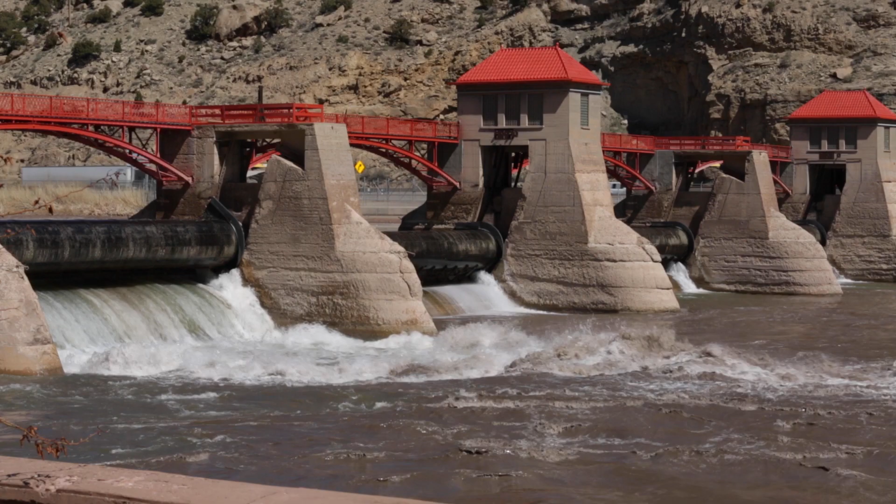I've got a personal connection with the irrigation history in the Grand Valley. I grew up here, so I always knew how important irrigation was. My grandparents on my mom's side of the family were caretakers of the roller dam in De Beque Canyon from 1926 until 1959. So I got to go up there as a youngster and watch Grandpa do what he did with the roller dam to make it work.

Then on the other end, my dad's side of the family, they were end users of the system. They bought land and planted orchards on East Orchard Mesa in the early 1930s, and we used it there. Growing up, my parents had land and orchards about a half a mile west of Granddad's place. So I grew up around irrigation and peaches and all that kind of stuff until about 1963, when the big freeze came along.

It killed a lot of the trees in the valley, and it changed things for a lot of people. So anyway, I'd invite you to join me through this time travel as we learn the interesting history of irrigation in the valley and the fact that it's really the true lifeblood of our existence here.

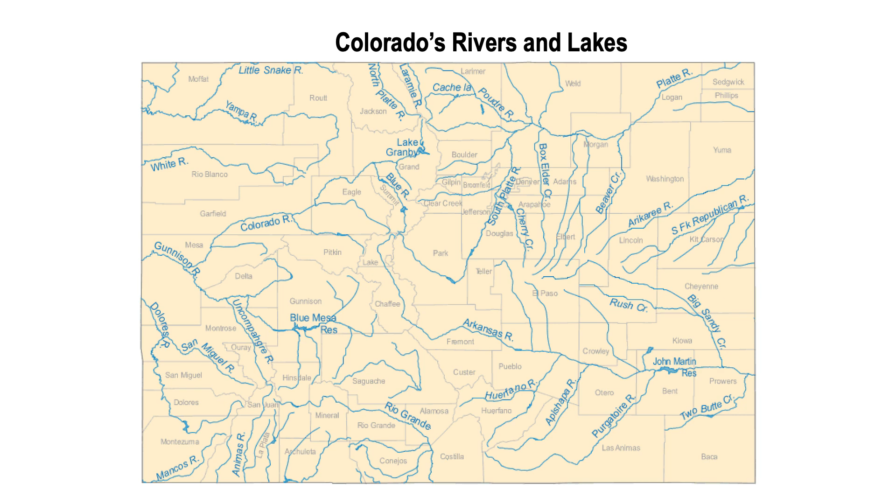Next here are the Colorado rivers and lakes. Literally all but one river runs out of Colorado. They start in Colorado, so we truly are the headwaters. You might have heard a lot of talk recently about water rights and the impact it has on Colorado and the western slope. We're really protective around here of our water, which has some of the oldest rights in the state. We're pretty protective of that water being diverted from the western slope over to the Front Range, because it's so vital to us.

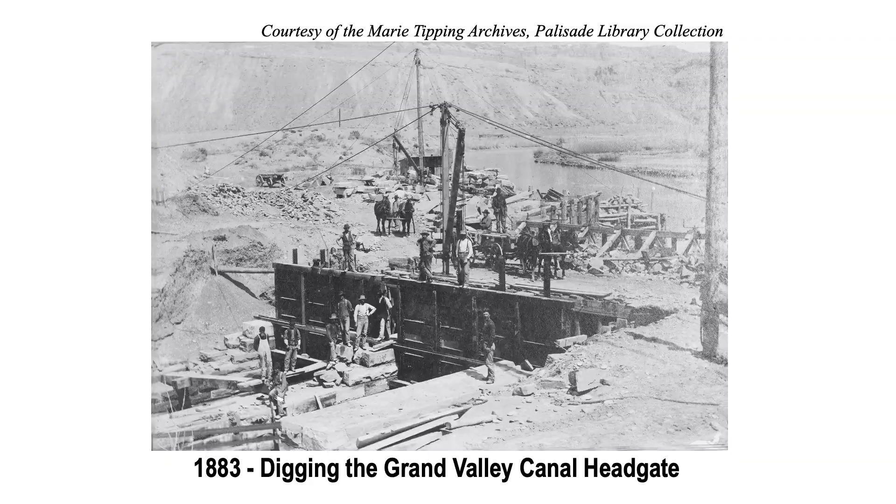This next photo is a more modern photo - that's what the headgates look like now. If you go up on the Orchard Mesa Hill, which is 38 Road, and look down on the river, you can see where the water is diverted for the Grand Valley Canal System. Or you can go to the end of Brentwood Drive out past Taylor Elementary School in Palisade and look out over the river and see headgates there.

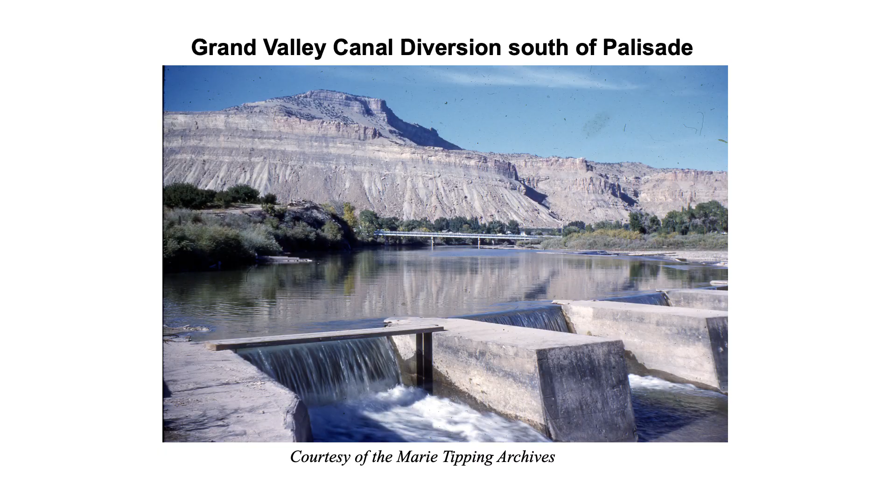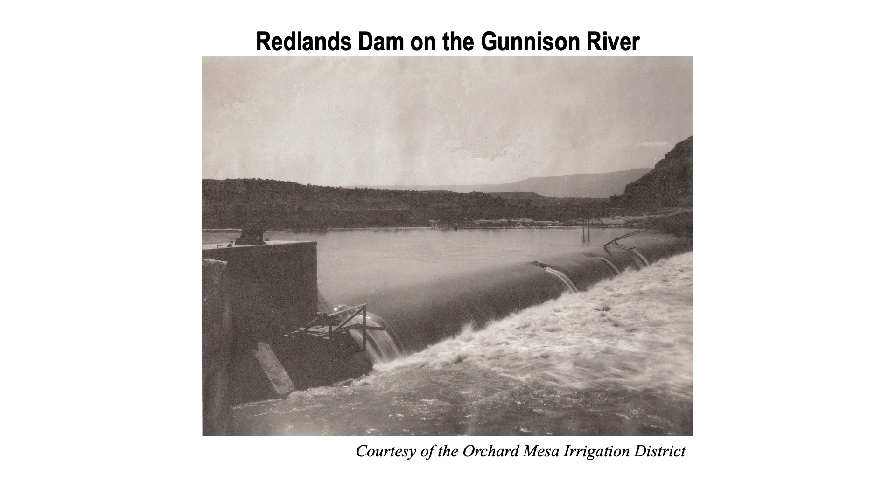He also built another ditch called the Crawford Ditch, built in 1888, which diverted water from Rapid Creek above the Grapevine Ditch, then ran north over a large tract of land called the Lloyd Ranch, near Mesa, Colorado.

The Grapevine and Crawford ditches are no longer in use. The farms on Rapid Creek now get their water from the Orchard Mesa Irrigation Canal.

Then we have Colonel Bauer, another Palisade resident who was one of the early settlers in the valley. He diverted water from the river to water land in the Vinelands, which originally was called Poverty Flats, east of Palisade.

John Gordon owned a pumping plant in the Vinelands also, and brought water to the Orchard Mesa Canal through the eastern part of the Vinelands.

Frank Berger built another canal called the Mount Lincoln Ditch early in 1890. It was to be laid out near the proposed Highline Canal, which came along later, and they used only electric pumps to lift water from the river.

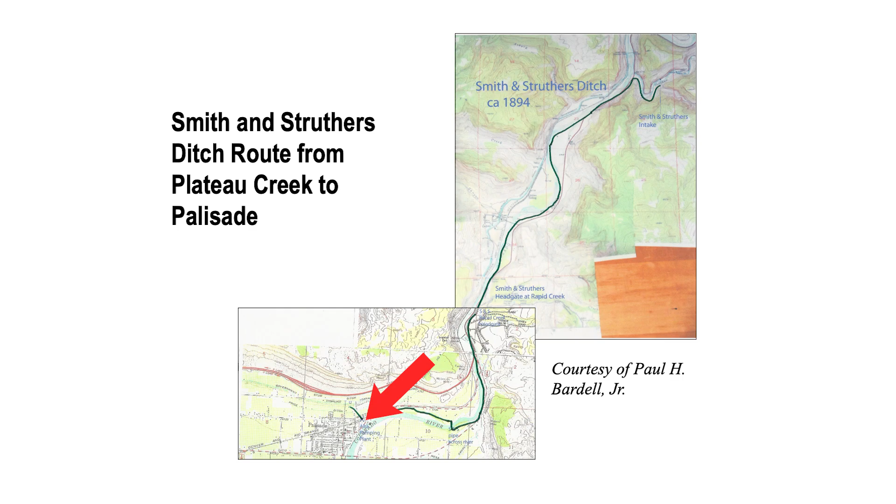You can see here on the map, if you look carefully, where that pipeline crossed the river right along in there. The Stub Ditch was in its flume around 1912.

They began building it in 1903 under the name of the Highline Mutual Irrigation Company, which authorized construction of this second canal, later known as the Stub Ditch.

It began delivering water in 1904, and has the distinction of being the only irrigation project in the county that was developed solely by the landowners.

In 1904, the Mount Lincoln Power Canal and the powerhouse suffered damage from spring runoffs. They had a lot of financial troubles, and when the pumping plant needed to be rebuilt, it was going to cost them $34,000, which the company couldn't pay without going bankrupt.

So the voters approved the Palisade Irrigation District to float bonds for the indebtedness to fund the repairs. The first action of the Palisade Irrigation District was to purchase the Mount Lincoln Land and Water Company and the Highline Mutual Irrigation System.

This included all of its canals, water rights, pumping plants, and related land, purchased for $150,000 in January of 1905.

Gravity-fed ditches were not sustainable, and there was a lot of seasonal variation in river height, so a lot of the early projects used electric power only to pump water into the canals.

There was always an irregular supply of water, and in fact in 1909 it caused so much conflict that the Palisade Irrigation District ditch riders were appointed sheriff's deputies to keep the peace amongst the people.

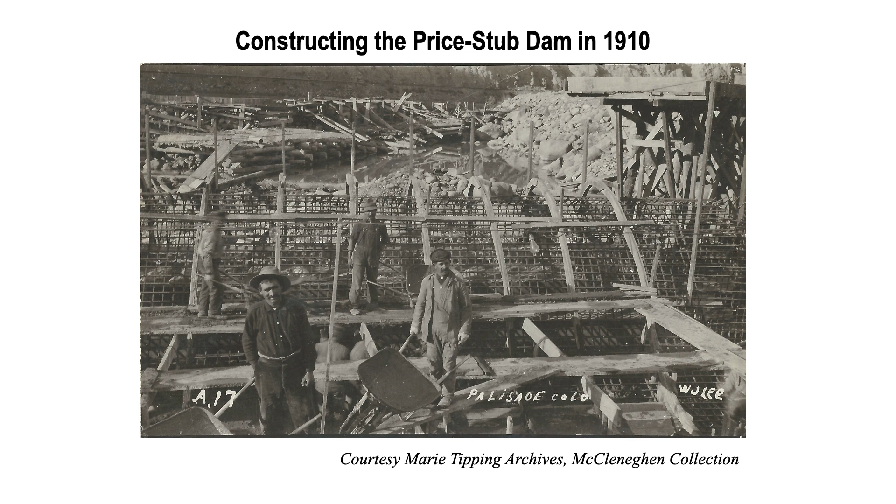Here's another later photo of the same dam, located just upstream from where the current I-70 bridge crosses the Colorado River leaving Palisade going into DeBeque Canyon. A fish ladder was added on the east side of the dam in 2007, and riprap material was added later, so it no longer looks the way it does in this photo. This is a whole different presentation of what it used to look like back in the day.

Here's a map from 1905 of the alkali. Water wasn't the only important factor—soil was too. Besides Palisade's perfect climate for growing peaches, this map shows they had good soil there. The darker areas show larger concentrations of alkali, closer to the river, while areas further away were freer of alkali and better for growing crops.

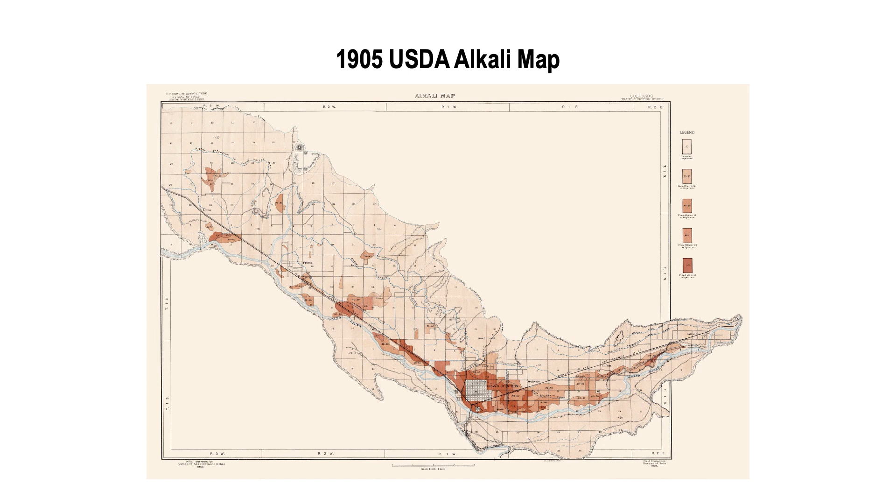This next slide shows construction of another dam that no longer exists. This dam was built across the Colorado River above the current roller dam and was completed in 1909. It was later removed, but it served as a diversion dam about half a mile above the roller dam.

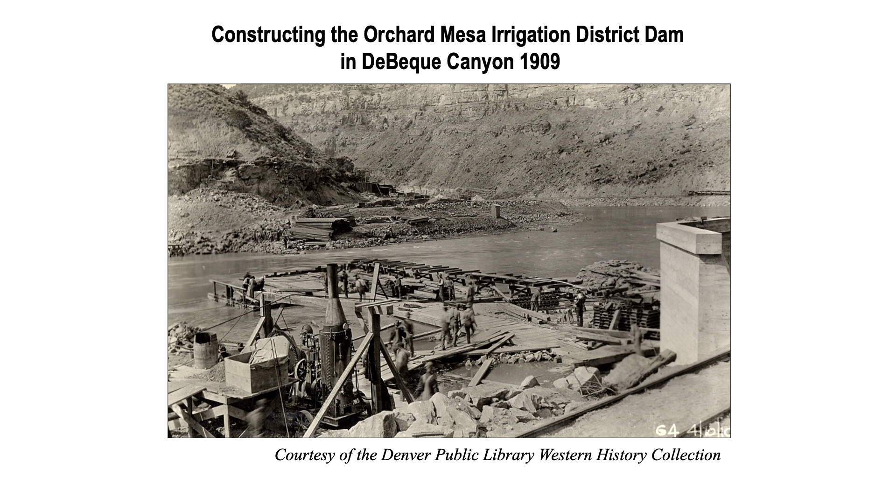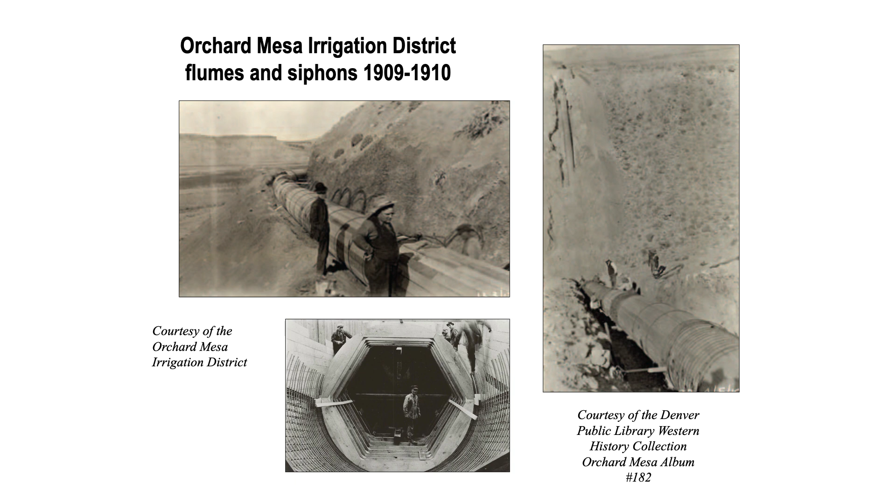The nine-mile-long wood stave power canal was built on the east side of the river, with several siphons and flumes built to carry water over uneven terrain from the dam to the base of East Orchard Mesa Hill. Here's another photo of the construction of the pumping plant serving East Orchard Mesa.

This is a view from the top of East Orchard Mesa. There was another small irrigation system called the South Palisade Irrigation District, built just east of the Orchard Mesa Irrigation District. It had a 300 horsepower gas-producer pumping plant, the largest of its kind ever erected in Colorado, but it had a lot of trouble and was finally abandoned in 1918.

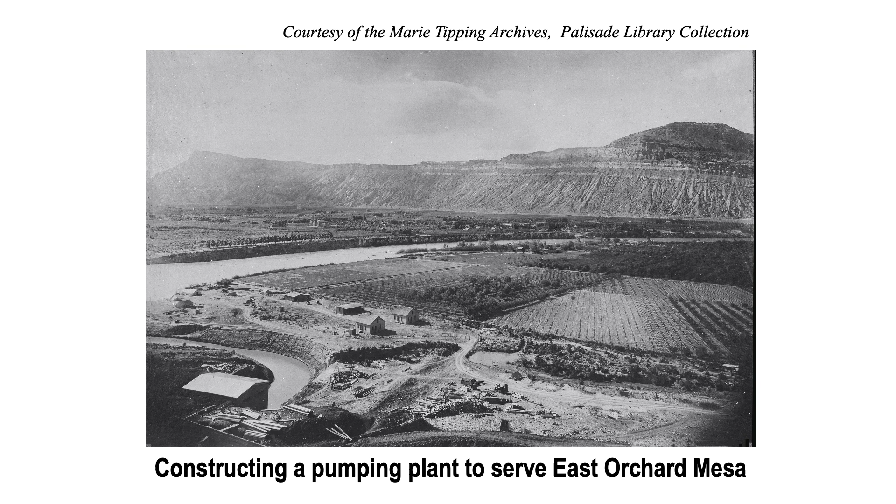If you know where the Sobre El Rio subdivision is, on the east end of Orchard Mesa, that's about where the South Palisade Irrigation District was. After they lost their water, they had to abandon their orchards, which is why it reverted back to desert. Here's another photo of men pounding rivets into the penstocks, the pipes that go up the hill.

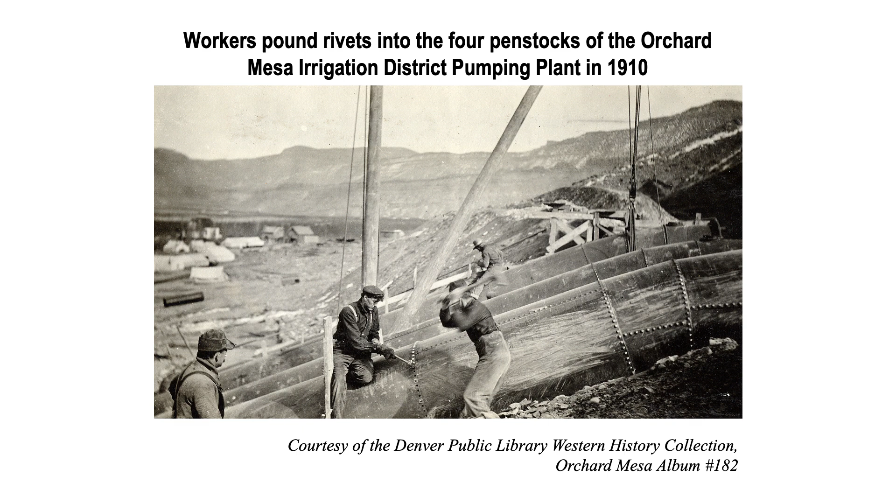This was for the Orchard Mesa Irrigation District project built in 1910, just another example of the hard work it took to build these systems. It's important to note that a lot of the original structures are still in place and still functioning today.

Here's another photo from 1939 of the pumping plant that pumps water from the canal and the river up to Orchard Mesa onto the two canals up there.

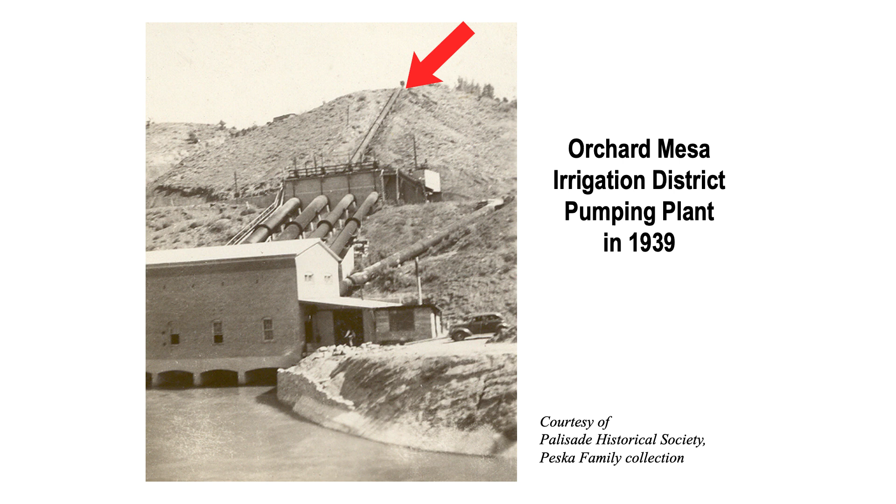You can see from this early history how complex and difficult it was to build all these systems. So in 1915, when the roller dam came along, it was really viewed as a good solution for many of the smaller irrigation projects to have their irrigation water on a more consistent basis.

The Palisade Historical Society celebrated the 100th birthday of the roller dam five years ago, in 2015. We sponsored a big birthday party for the roller dam in June of that year.

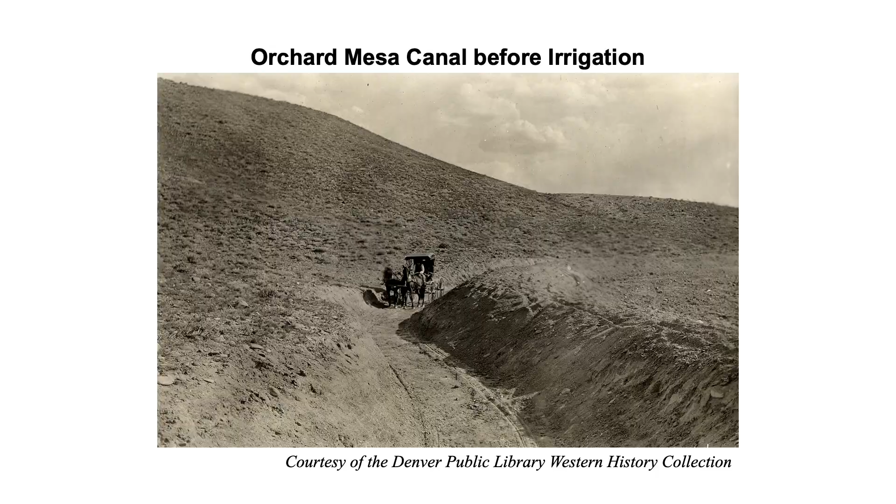The Grand Valley Project was one of the first 6 projects activated by the Reclamation Act of June 1902, which created the Reclamation Service, later the Bureau of Reclamation. They withdrew land from settlement to prevent it from being dispersed before the projects were completed.

The canal routes were surveyed in 1897, and work on the alignment of the canals began in 1902. They concluded the flow of water was sufficient to supply 2,000 acre-feet during irrigation season, but it wasn't practical to extend the system all the way into Utah as some had envisioned. It would still reach another 51,000 additional acres at a cost of $27 per acre.

In 1903, a Grand Junction group proposed the project be constructed and paid for with private funds, so the government backed out, not wanting to interfere with private enterprise. But after several years, it became apparent the plan for private construction was not going to proceed.

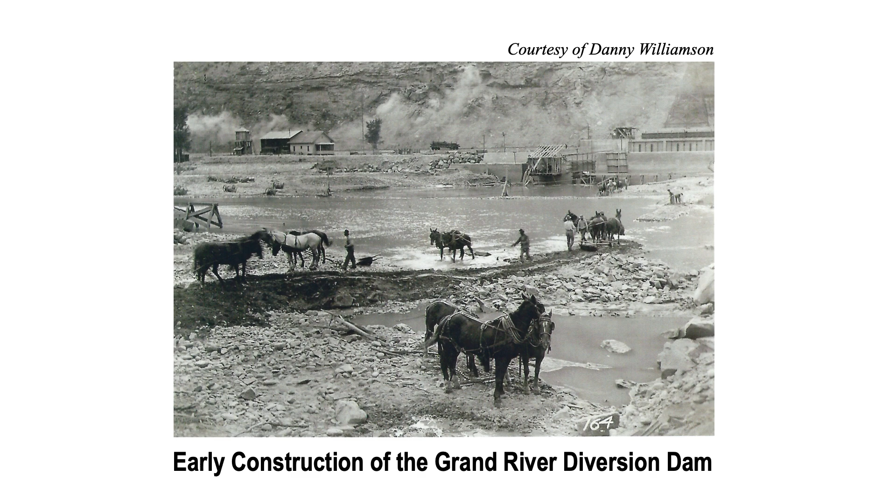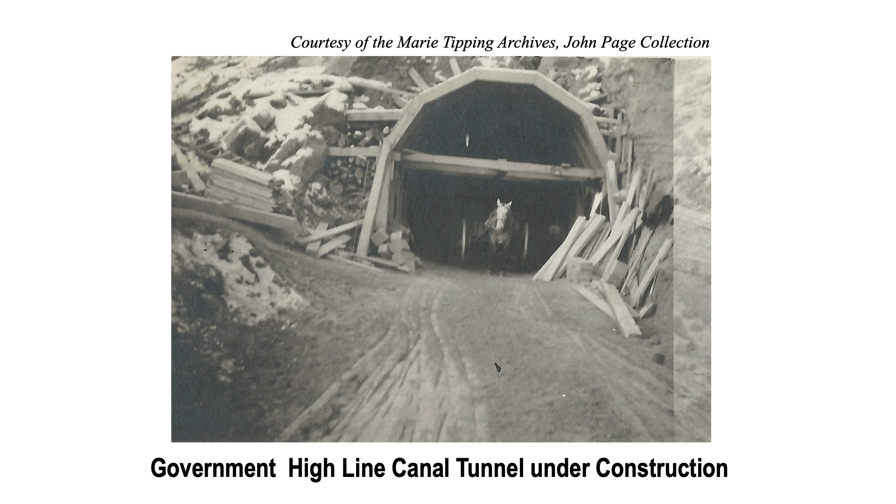I have to tell you a story my mom used to tell. She lived up at the roller dam, and the only way to get from Cameo, the mining town below the roller dam, was across this swinging bridge. Well, there was a guy on a motorcycle who drove across the swinging bridge one night, and his motorcycle backfired and sparked, catching the bridge on fire.

So the bridge burned, and there was no way for them to get across the river. Since this was in the wintertime, luckily, they used the number 3 irrigation tunnel to get between Cameo and Palisade. In fact, they even drove their cars through the tunnel to get there. It was pretty amazing. But by the time the irrigation season came along, they were able to get the bridge replaced or repaired, so water could come back into the tunnel again. It was pretty interesting.

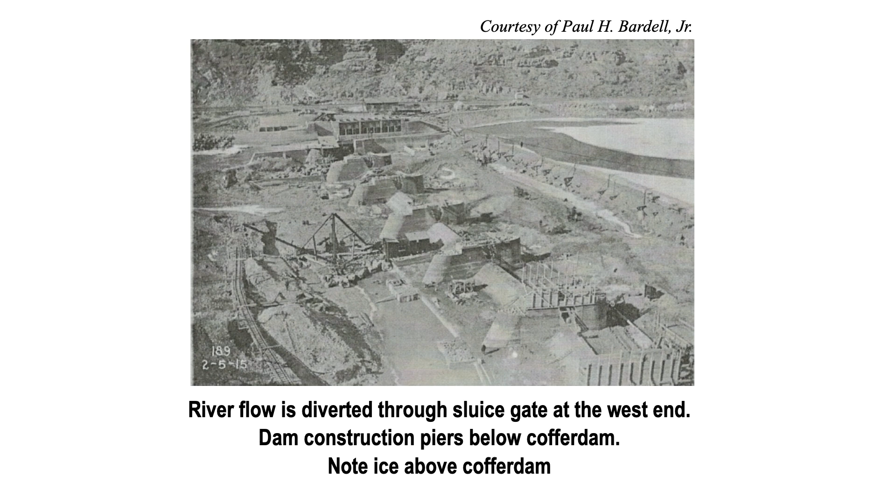But it's a nice story. Looking at documentation in the engineering journals, it was found that the more true story was that the German firm decided they were not going to be able to do the construction of the rollers in Germany, so they couldn't fulfill the contract. So there was another company in Pittsburgh, Pennsylvania called the Riter-Conley Manufacturing Company that actually fabricated the rollers using the German company's design. The rollers were put on the railroad and shipped to the dam site.

By the time the rollers got to the dam site, a lot of the work had already been done on the dam. There wasn't any road that went through the canyon at the time, so the railroad was really the only way they could get the rollers there.

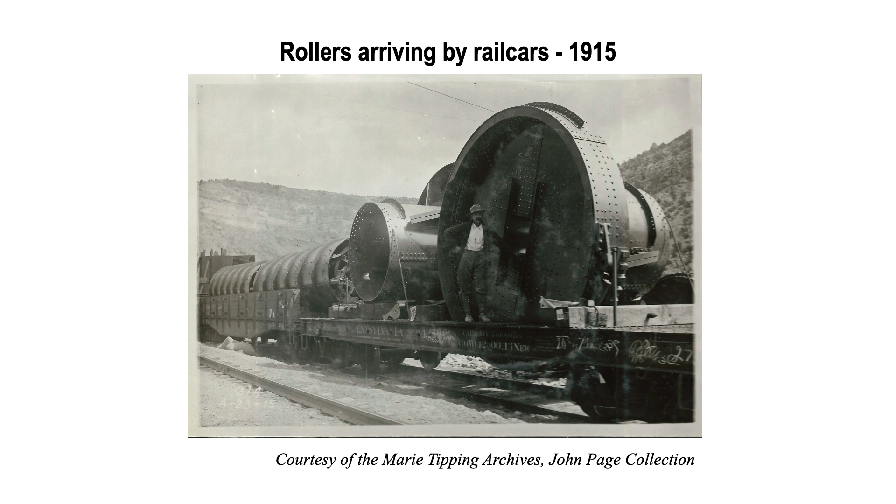They got the first roller installed in March of 1915, and then the second, or final, roller was installed in June of 1915. This whole project, the Roller Dam and the government Highline Canal and the other five canals, are all known now as the Grand Valley Project. It stretches over 90 miles of canal work from the roller dam all the way to Mack.

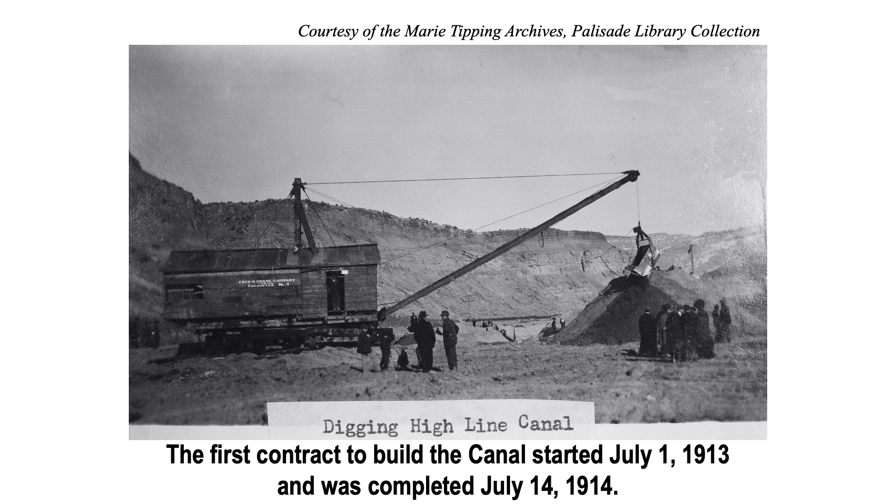Here's another photo of what equipment was used to excavate for the canal systems, which were started in 1913. And here they were digging the Highline Canal, and this work was completed in 1914.

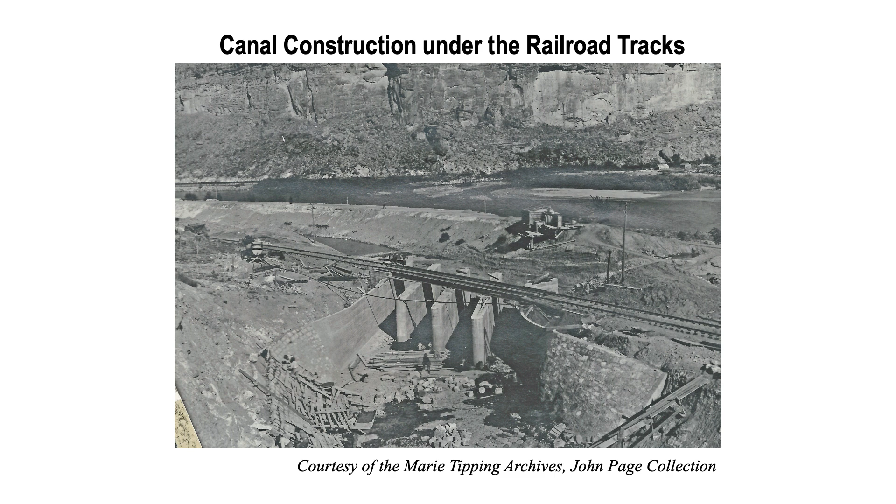In 1921, they began work on constructing the siphon underneath the river. Water was taken from the government Highline Canal, under the river, into a power canal that stretched all the way to the east end of Orchard Mesa. It was then pumped up into the two canals on Orchard Mesa. The Grand River was then renamed the Colorado River that same year, 1921. So when the Orchard Mesa diversion dam above the roller dam was no longer needed, it was removed.

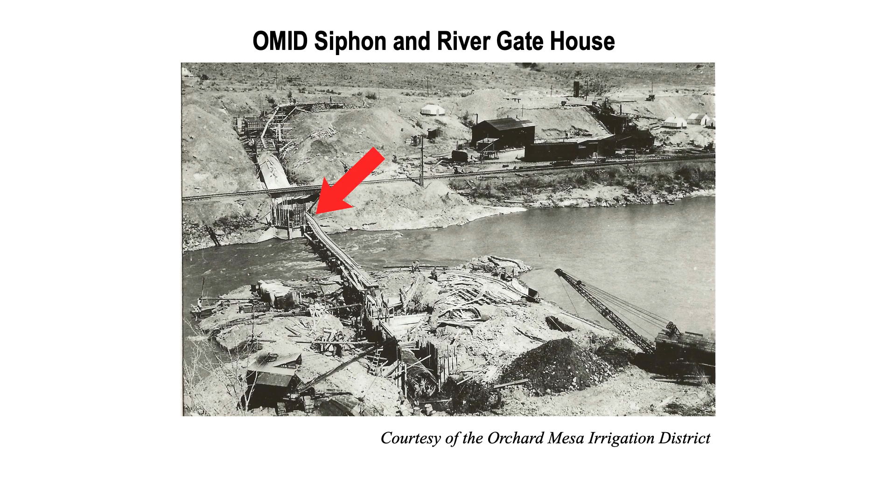The proposed straightening of that curve on the highway, which the Department of Transportation wanted, would have cost $71 million. That could have had devastating consequences for agricultural land on Orchard Mesa, which depends on water from that power canal. So it was a good thing they proceeded the way they did and didn't do that.

Another important development was the Colorado River Compact in 1922. About the time the siphon was being constructed on the Colorado River, the Compact was made as an agreement between 7 states, the upper basin and the lower basin. The upper basin states were Colorado, Utah, Wyoming, and New Mexico, and the lower basin states were California, Arizona, and Nevada. But especially California and Las Vegas have outgrown their allotment for water.

With the recent droughts, keeping water rights for agriculture has been very challenging for us. Last year, our needs for water for our canals in the Grand Valley exceeded the supply. So the Orchard Mesa Irrigation District provided a list of entities that gave us some of their water rights temporarily. Most of this came from the Ruedi Reservoir, to allow the Colorado River to meet the needs of our older water rights for both irrigation and agriculture, and to sustain the fish as well.

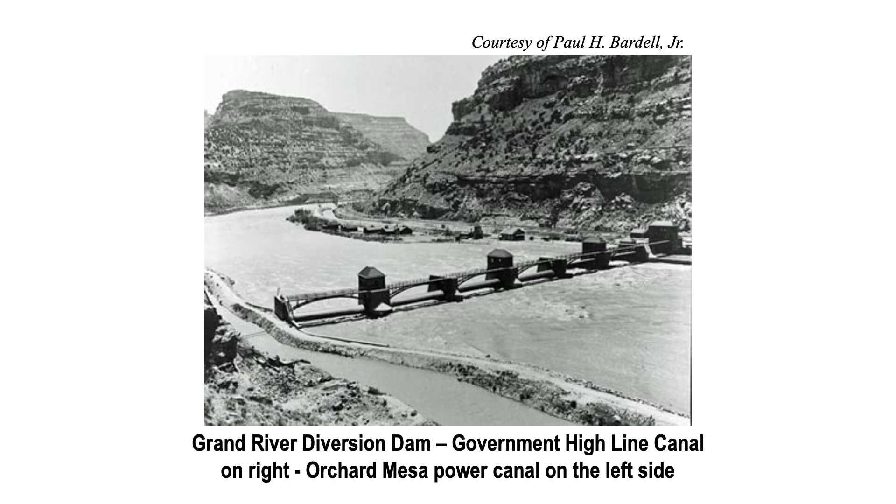You can see here the Orchard Mesa Power Canal was on the east side of the river where I-70 is now located; it runs along right there. In 1909, the original Orchard Mesa Diversion Dam was located some 3,000 feet upstream from the planned Grand River Diversion Dam. The original plan was to divert water from the roller dam directly into that canal, but it's a good thing they didn't do that, because later on it would have caused problems for the construction of I-70 through that area.

Using funds advanced from Public Service Company of Colorado, a power plant was constructed just north of the 1910 pumping plant here at the Orchard Mesa Irrigation District.

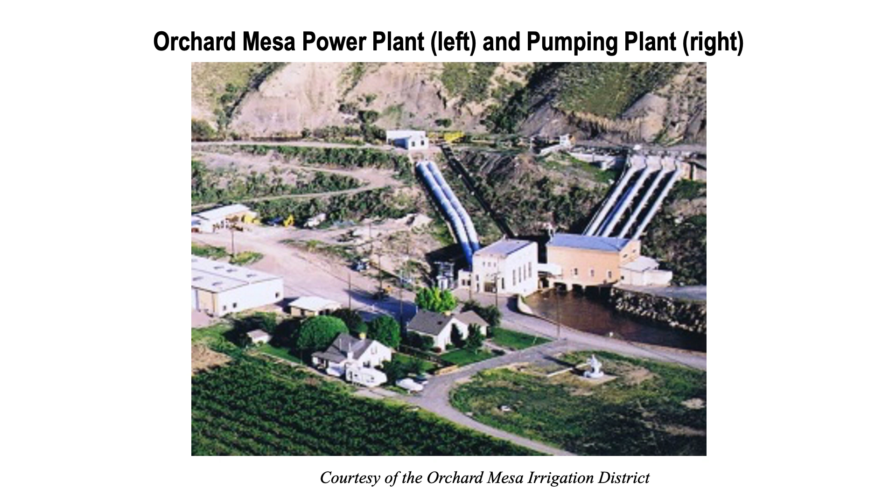The Orchard Mesa pumping plant pumps irrigation water some 300 feet to two canals up on East Orchard Mesa. The 3,000 kilowatt capacity hydroelectric plant, now operated by the Orchard Mesa Irrigation District, uses water to drive the pumps which supply water for the irrigation season, as well as to generate electricity 11 months out of the year. The hydroelectric plant is in the process of being rebuilt to make it more efficient and to replace deteriorating equipment.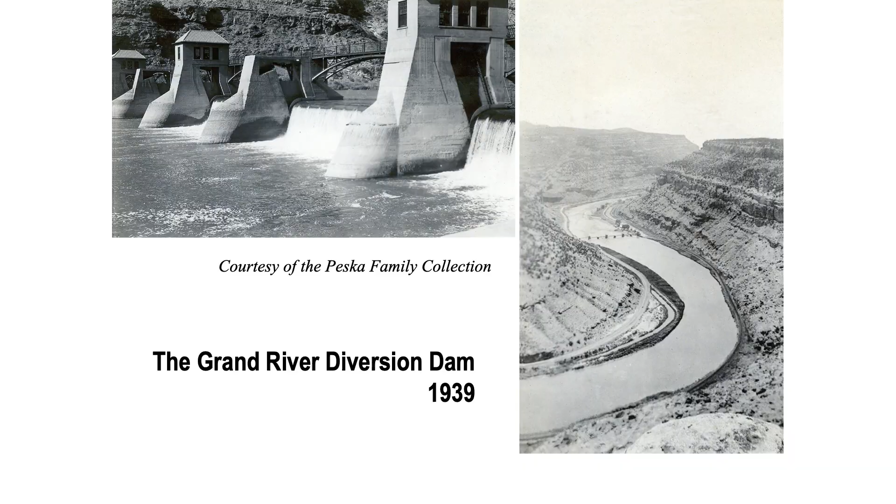In March of 1941, significant damage was discovered in the Highline Canal, tunnel number 3. It was pretty close to the beginning of the irrigation season, so it wasn't possible to make permanent repairs. Almost 100 feet of the tunnel was completely rebuilt after the irrigation season ended.

In 1949, the Bureau of Reclamation turned over operation of the Grand Valley project, which was the roller dam and the government Highline Canal, to the Grand Valley Water Users Association. But the problems continued, and minor repairs were done along the way.

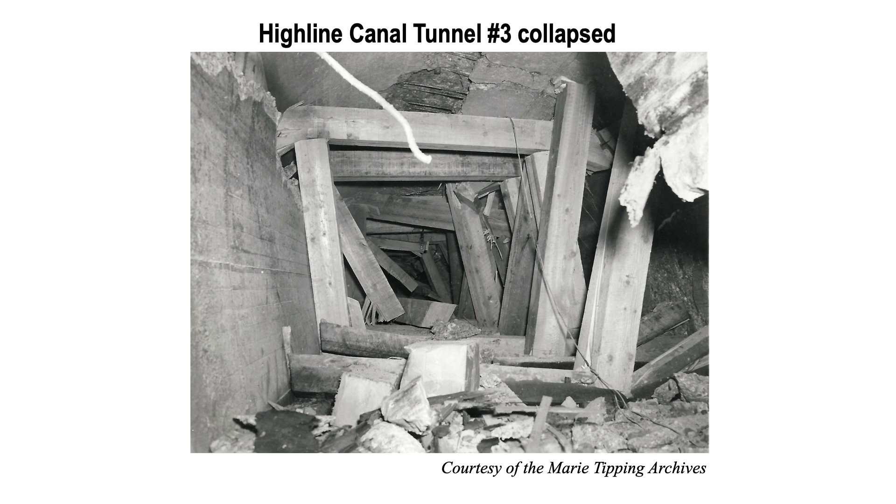But in 1950, over 450 feet of tunnel number 3 completely collapsed. You can see here in the photo that collapse in the tunnel, the timbers and that sort of thing. And here's another shot that shows a car in that tunnel.

Palisade's Wayne Aspinall, who served in the U.S. House of Representatives from 1949 to 1973, mustered the federal funds necessary to repair the tunnels in record time.

What they did is they drove an adit midway between the two ends of the tunnel, and then they dug in all 4 directions to make the new tunnel, and they holed it through on April 4th, 24 days ahead of schedule. Water deliveries began on May 4th, so they were able to continue without interrupting the water throughout the season. Then they did more permanent repairs in December after the water was no longer needed and out of the tunnels.

And here you can see a car that was driven down into the tunnel to either inspect the damage or to look at the work that was being done on the repair.

Then when I-70 was constructed through DeBeque Canyon, the Orchard Mesa Power Canal and part of the Colorado River siphon and the extension of the lower part of the number 3 tunnel had to be rebuilt.

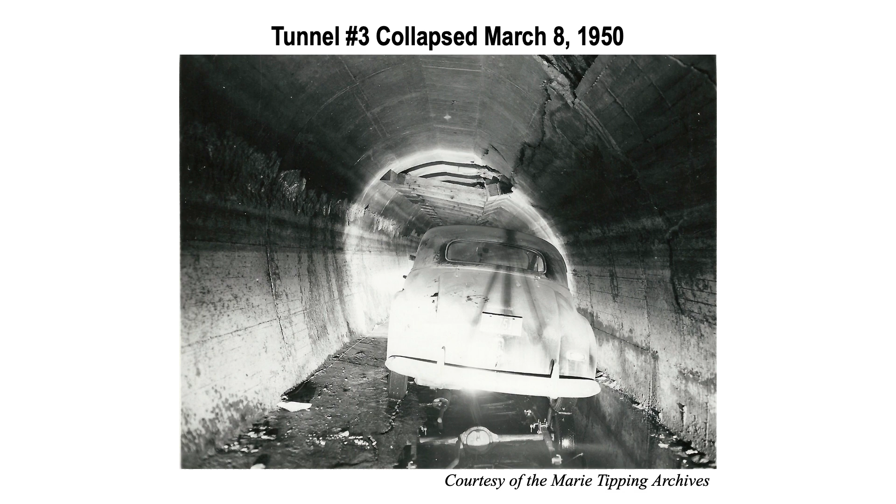And in 1989, we had 25,544 total acres on 803 farms that were under irrigation, with an average crop yield of $512.52 per acre. In addition, over 21,000 non-farm individuals received Grand Valley Project irrigation water.

The roller dam was placed on the National Register of Historic Places in October of 1991.

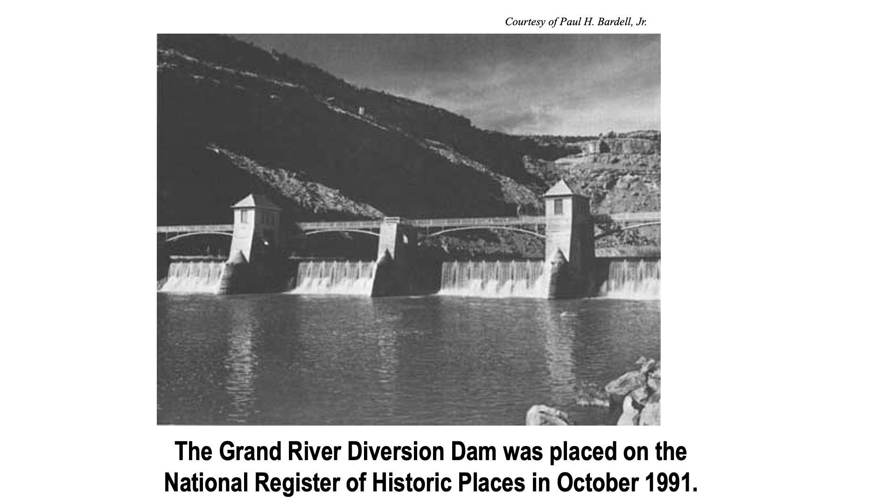The mission of the Palisade Historical Society is to collect, preserve, and communicate the unique history of Palisade and to foster, encourage, stimulate, and develop public appreciation of this history. So we're a continually active, all-volunteer organization.

We offer a variety of programs. We've done classes for New Dimensions, Western Colorado Community College, as well as Grey Gourmet. We've done guided walking tours of downtown Palisade. This last year, we also provided historic Palisade coloring books and programs to over 300 elementary school students here in the valley, thanks to funding from area Rotary clubs. And our historic walking tour brochure is also available as an ebook.

One of our major projects has been to get as many issues of the Palisade Tribune as possible online with the Colorado Historic Newspaper Collection, which is part of the State Library. So to date, we have over 2,650 issues online, including all known issues from the first one in 1903 through 1950, as well as other more recent issues.

The neat thing about this is that the database is searchable, so it makes it a really excellent tool for doing historical research, looking up information on your family members. I found out that my grandmother, for example, won all kinds of awards for flowers that she'd grown back in the 1940s, or simply just learning what life was about back in that day, looking at the advertisements and that kind of thing. So it's pretty cool.